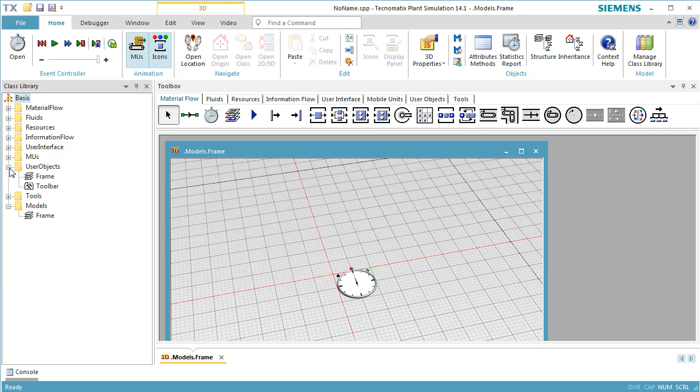In a first step, we create our own processing station. To do so, we open the folder User Objects and double-click the frame which already is in the folder. If you want to create a new frame, open the context menu of the folder and select New and then Frame. We rename the frame to My Station.

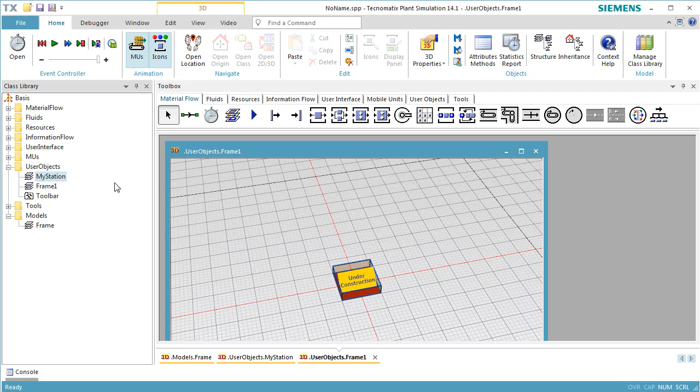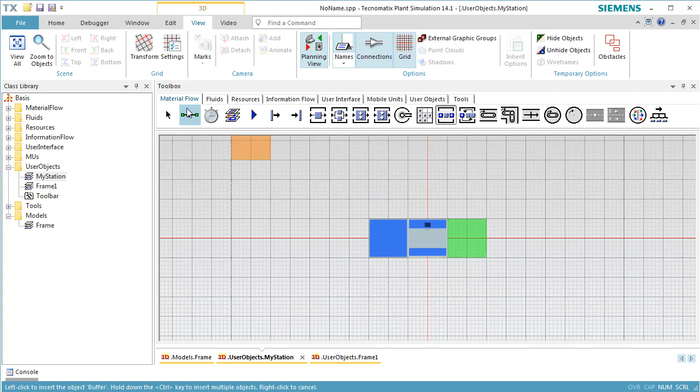We insert a station and a buffer in front of the station and a buffer as a successor of the station. To connect our station with other stations, we have to add two interfaces. Connect the interfaces with the buffers.

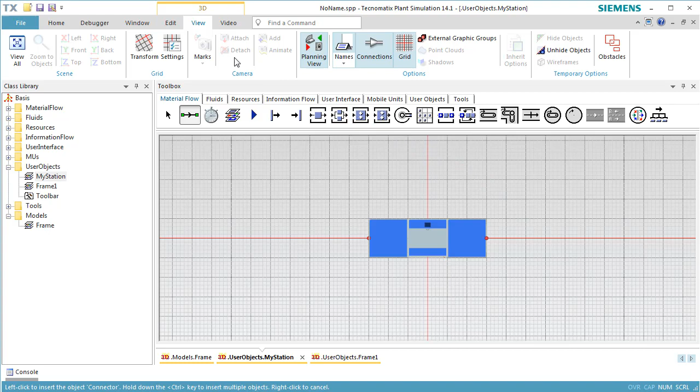Now we create a safety fence around our station. On the tab Edit of the ribbon bar, we select Fence in the group Insert Shape. We create a fence with the dimension of 6 meters by 3 meters. After clicking Create, we have to position the fence around our station.

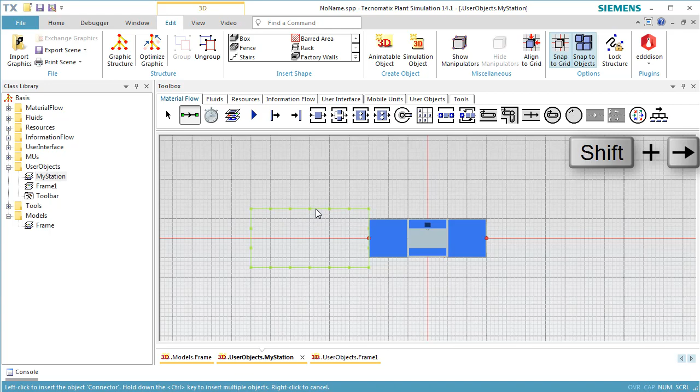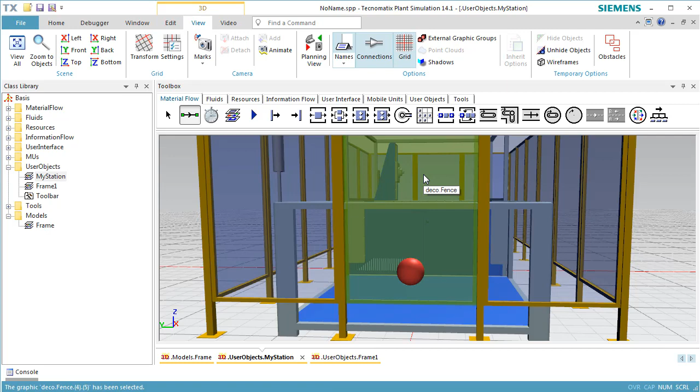To allow products to move in and out of my station, we have to cut a hole into the fence. To do so, we select the fence and position the cursor at the part of the fence that we want to delete. To step into the graphic of the fence, we press Shift plus the right arrow key until only that part of the fence is selected that we want to delete. Press the delete key to delete this part of the fence.

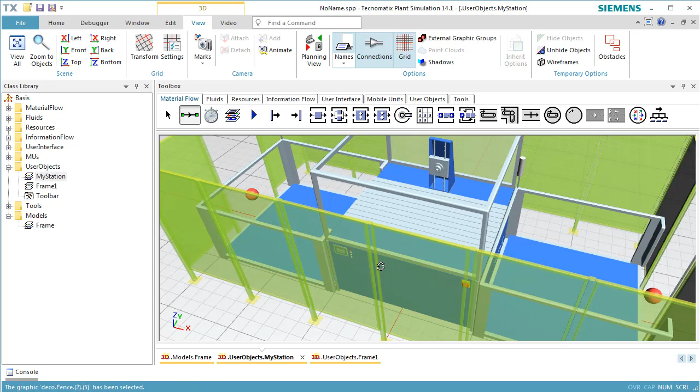In the same way we delete the respective part of the fence on the opposite side. Now our station has two holes where the products can enter and leave the station. Let's assume we also need additional objects in our station, for example, methods, tables, and variables. So we add a method object, a variable object, and a table object.

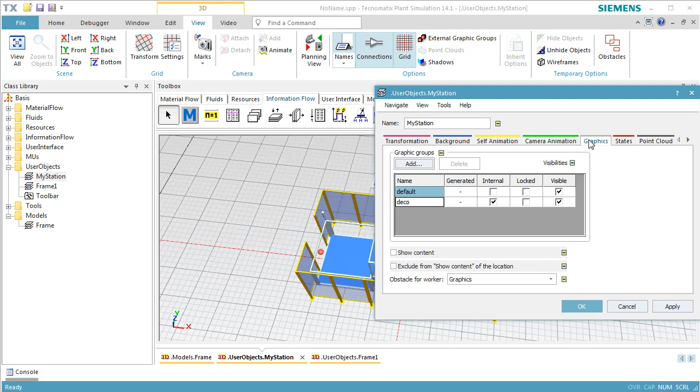We want to define what we will see when we insert My Station into a model frame. Press the right mouse button in the background of My Station to open the context menu of the frame and select Edit 3D Properties. Change to the tab Graphics in the Properties dialog. On this tab, we see the graphic groups of the frame, here the default group, which is not visible, and the deco group, our fence, which is visible.

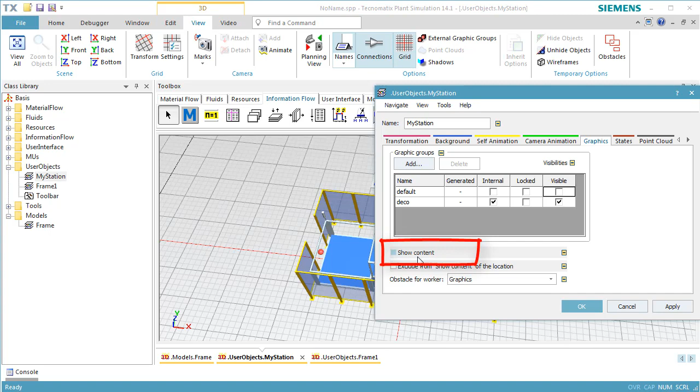On the bottom of the dialog, we see the checkbox Show Content. We can use this checkbox if we want to see the content of the frame or not. When inserting My Station into a model frame, we want to see the material flow objects and the deco, but not the information flow objects. The visibility of objects can be defined individually for each object.

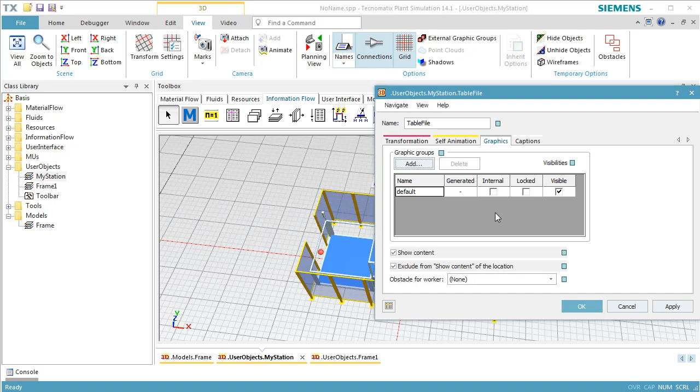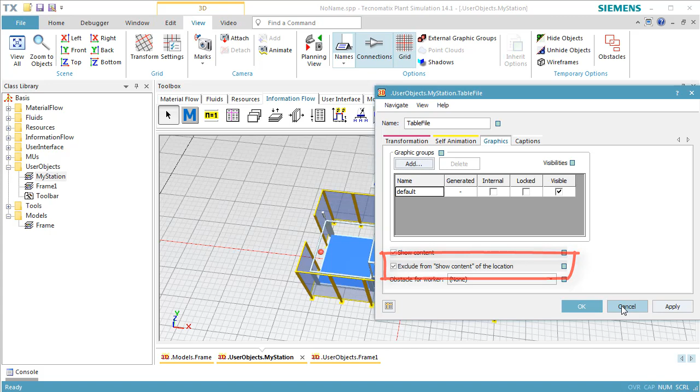Open the 3D Properties dialog of the object TableFile and change to the tab Graphics. On the bottom of the dialog, we see a checkbox titled Exclude from Show Content of the Location. With this checkbox, we can define if the object should be visible or not visible when Show Content of the Location is active. By default, this checkbox is marked for all information flow objects.

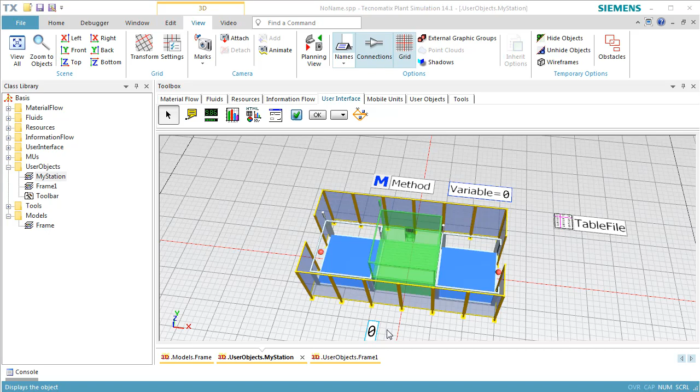In addition, we want to add a display which shows us the number of parts produced. We select the object Display on the tab User Interface of the toolbox and insert an instance of the display. Then we drag the station over the display and drop it there. This assigns the station to the display and adds the statistics value statNumIn. Double-click the icon of the display to open its dialog. The text box next to Path shows the value which will be shown during a simulation run.

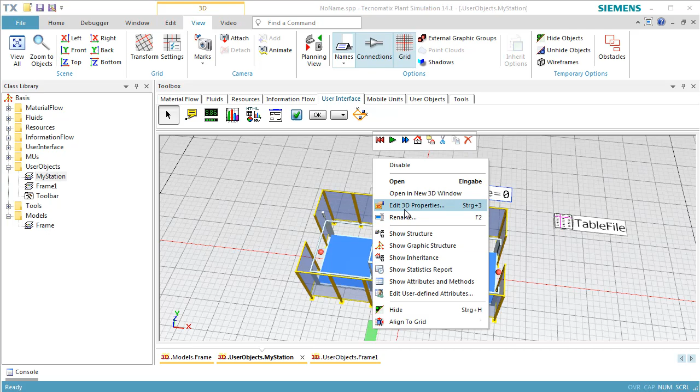To adjust the position and orientation of the display, we open the 3D Properties dialog. We want to rotate the display around the X-axis. To do so, we press the arrow button to the right of the text box, axis X, to define the rotation axis and enter 90 in the text box of angle.

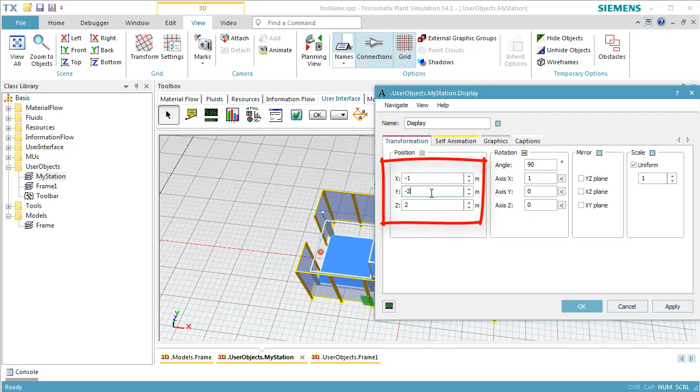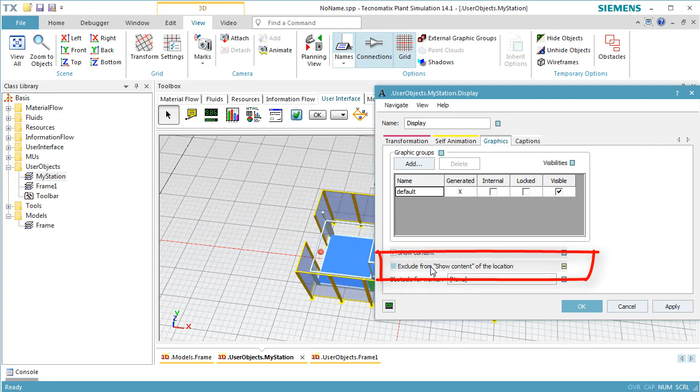We move the display in the Z direction by 2 meters and in the Y direction until the display is located directly in front of the fence. To do so, place the cursor into the respective text box, press the Control key, and roll the mouse wheel. Now we change to the tab Graphics and remove the checkmark at Exclude from Show Content of the location.

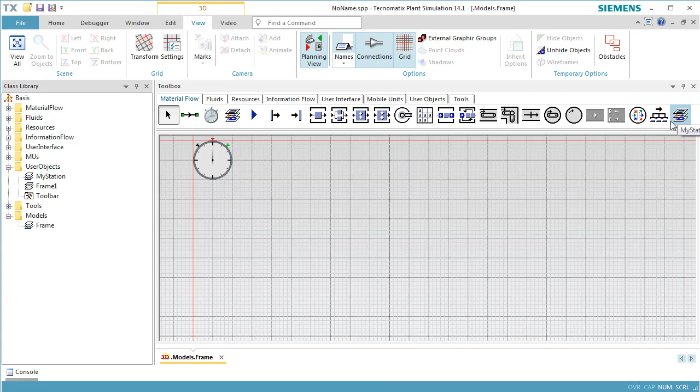After that, we create a production line using instances of My Station. First, we add My Station to the tab Material Flow of the toolbox. We drag My Station from the class library to the tab Material Flow on the toolbox and drop it there. We insert a source object. To insert several instances of My Station, we press the Control key while selecting My Station in the toolbox. We click several times in our frame where we want to insert instances of My Station.

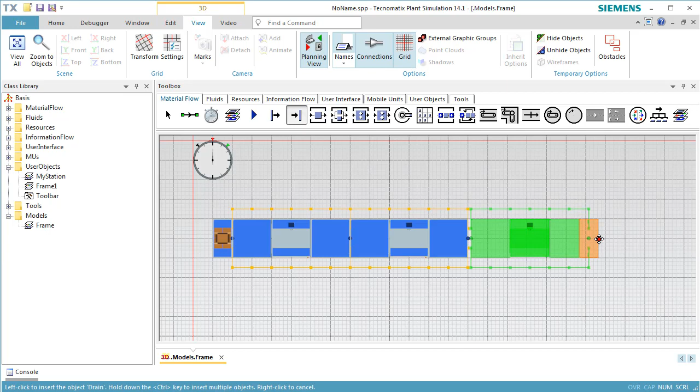Finally, we add a drain object at the end of the production line. When inserting the objects next to each other, they will be automatically connected. My Station also behaves as each of the other built-in objects of Plant Simulation and connects to the predecessor and successor object. We check if all connections are established.

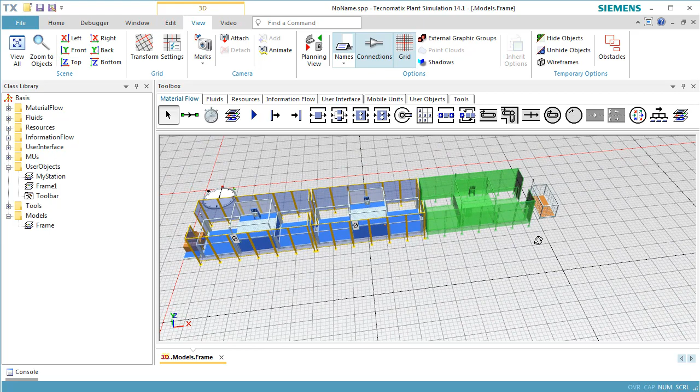Next, reset and start the simulation run. The display shows the number of parts produced by My Station. This concludes our lesson about hierarchical modeling in 3D.